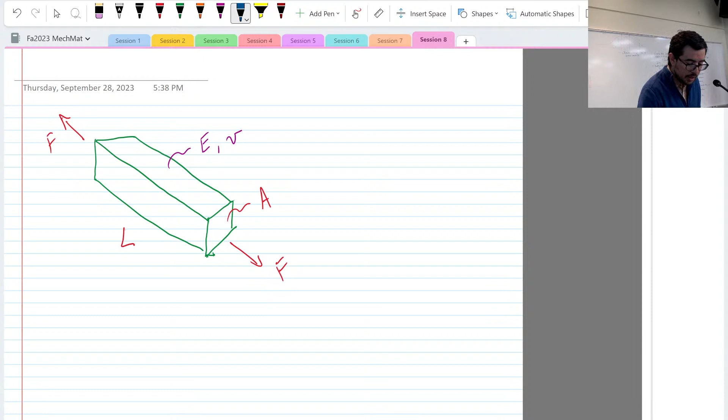If I want to know how much it deflects, you guys tell me, what's the equation at this point? We've done this a few times. What is going to be the deformation, the axial deformation of this bar? Okay, good, delta equals FL...

No, it was a joke, not a very well received. Okay, so it's FL over EA. All right?

And what is the stress, the normal stress? So like if I'm thinking about stresses in this direction, what is the stress? Yes, F over A, right?

Okay, and what is the strain? I'm going to call this sigma x, not sigma, sigma x. I'm going to call this epsilon x. I'm going to call this the x direction, y direction, z direction. So what is epsilon x?

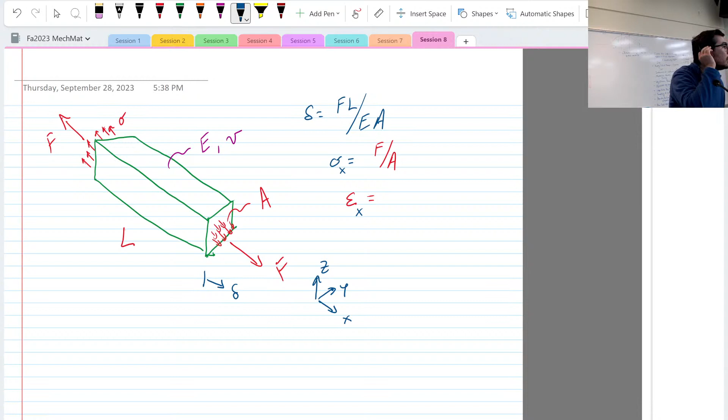Yes? What's that? E divided... what? I'm sorry, say that again? Well, that would suggest it's a constant, right? If you gave me E divided by 3, that just means it's a constant. I'm asking for the strain. The strain is going to be dependent on how much force is being applied.

So the strain is the change in the length over the initial length, right? One way to look at it is you could look at it this way. All right, that would be one way to look at it.

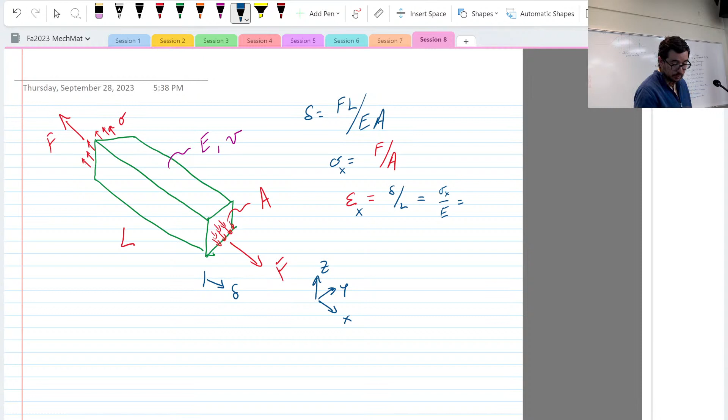Another way would be, if I know the stress, I know that if this is a linearly elastic behaving material, then sigma is equal to E epsilon. So then this is going to be sigma x over E, right? And so this is going to be F over EA.

Any questions on this? So you're like, why in the world would I want to simulate this? I know it all. True.

Okay, why do we do simulations? Because we want to be able to do more complex, understand what's happening in more complex geometries. But these are the baby steps in simulation. One day, maybe you'll look back and you'll be like, okay, I remember I was told this.

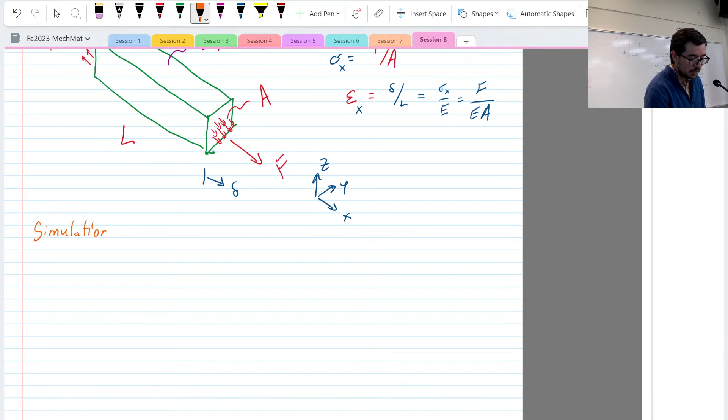Sometimes this happens so often, it happens with me personally, happens with a lot of people. You have this complex problem, and what you want to do is just simulate the living daylights out of it. But that's not the approach that's going to necessarily lead to the fastest determination of getting what you want.

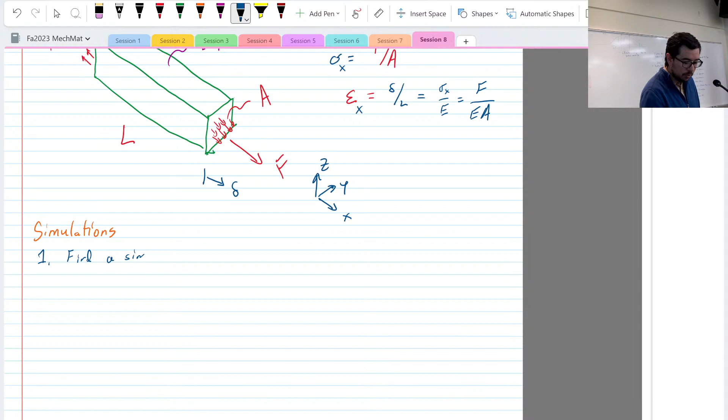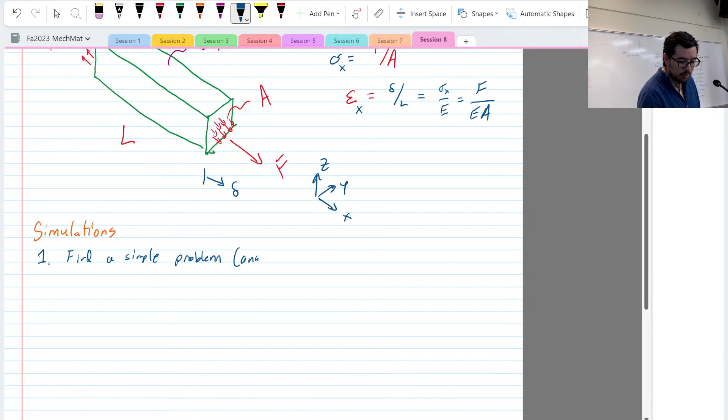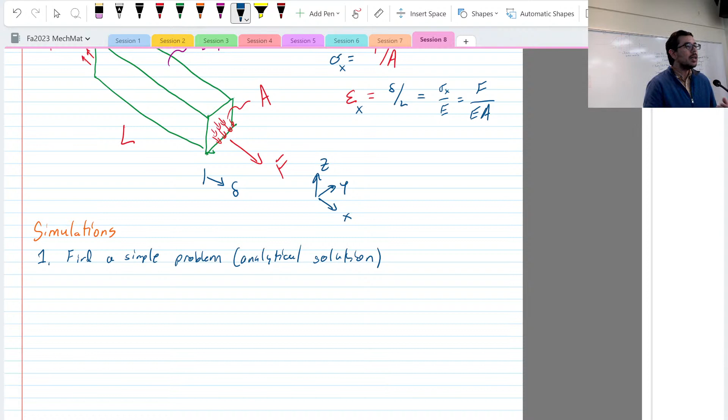So the first thing you should do is find a simple problem that has an analytical solution. This is hard to write on, I know my handwriting is bad, but it's even worse right there. So this is what we just did. We just found, we know what the answer should be by basic mechanics, shall we say.

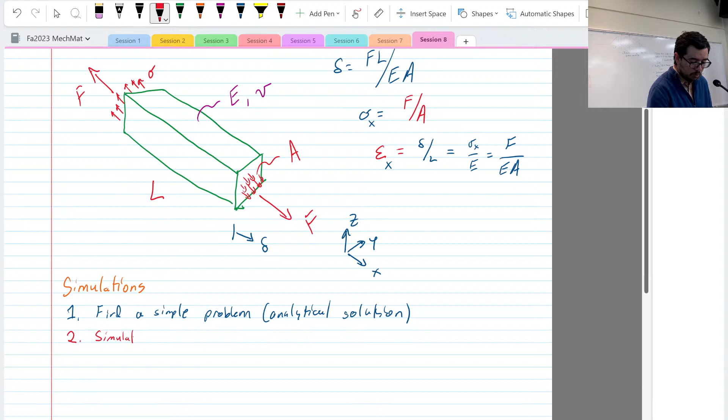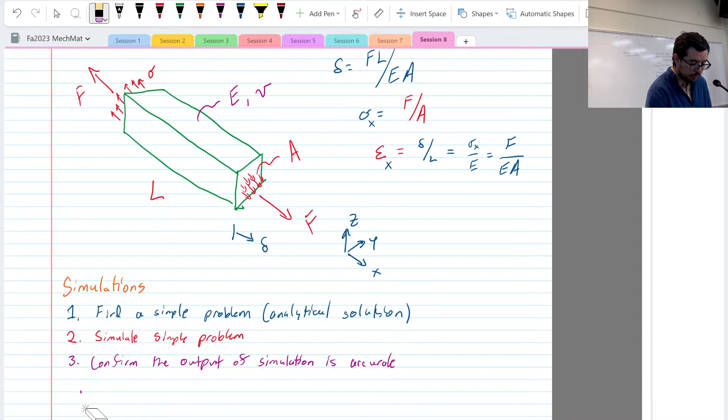Then we simulate that problem. Then we confirm the output of simulation is accurate. And then we go on our merry way of building more complex simulations.

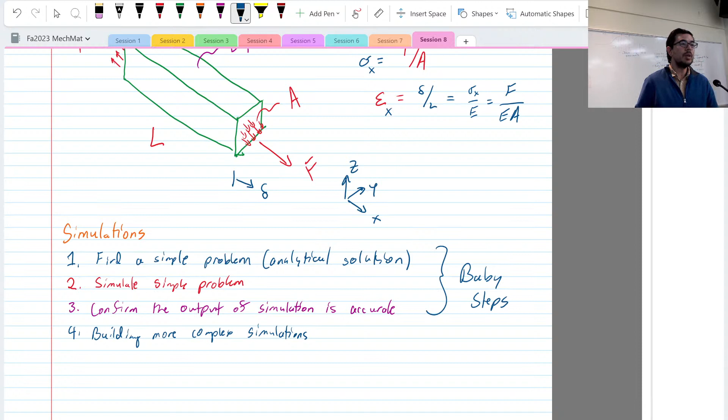If you skip the first three steps, you have no idea if your simulation is even behaving correctly. It's often a good idea to start with baby steps. With simulations, garbage in, garbage out. You can make really pretty pictures that have no relevance, or that do not have quantitative or even qualitative properties that are accurate.

So if you look in your notes, in the online notes, we can find a problem that's given. This is one iteration of session 8, Q1. Actually, maybe I'll just do it like this, it's better.

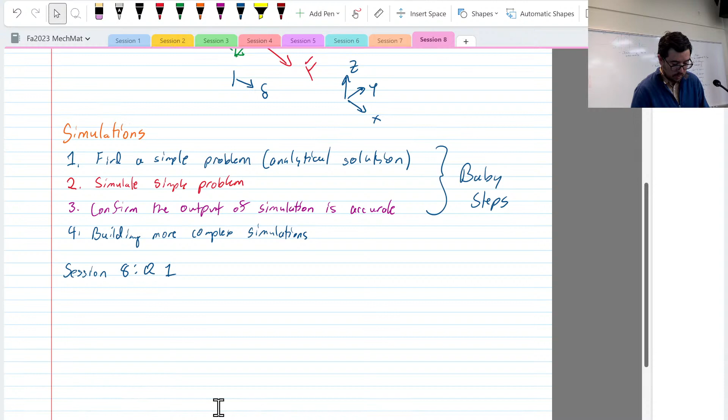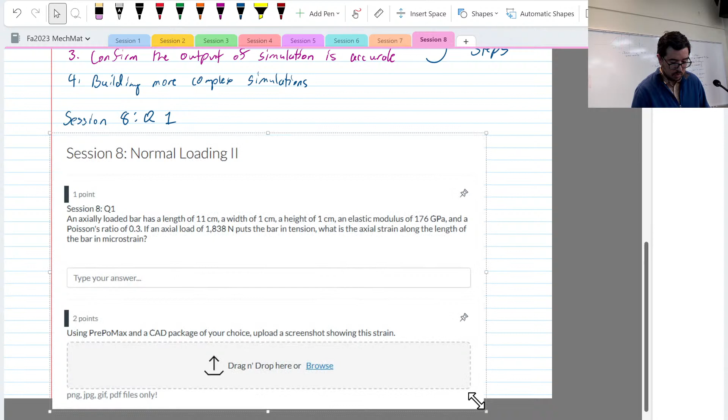We have an axially loaded bar with a length of 11 centimeters, a width of 1 centimeter, and a height of 1 centimeter. That means the cross-sectional area is 0.01 meters times 0.01 meters, which gives us 10 to the minus 4 meters squared.

It has an elastic modulus of 176 gigapascals and a Poisson's ratio of 0.3. It also has an axial load of 1,838 newtons. Did I forget anything? We want the axial strain along the length of the bar in microstrain.

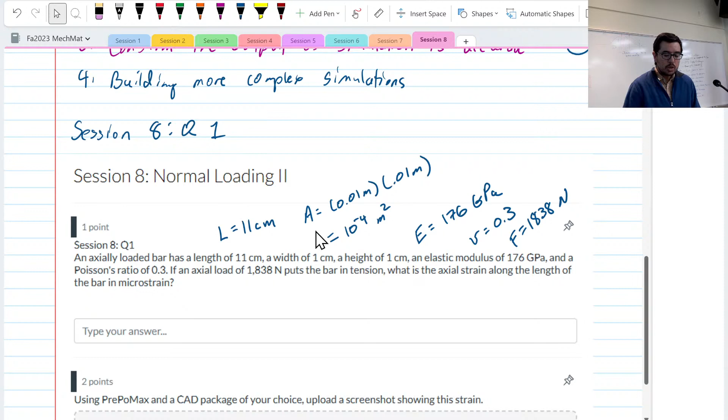What you can do is first build the model, the geometry, and then run finite element analysis. SolidWorks and other commercial packages are nice because they let you do both right there. In some companies, you have one group that focuses on design and another group that focuses on analytical simulation. The designers do their thing, the simulators do their thing, and it goes back and forth. This isn't the most efficient way, but it's a careful way, because multiple people look at different aspects of the same problem.

So if you like, you can use FreeCAD, or SolidWorks, or something else, but FreeCAD is readily available and runs on Windows and Mac. I don't think there's a much simpler way to put in this geometry and get an STL file, which describes the 3D geometry. From here you probably want to pay attention, since it's being recorded and there are other videos explaining this, so you don't have to take copious notes, just pay attention that we're starting.

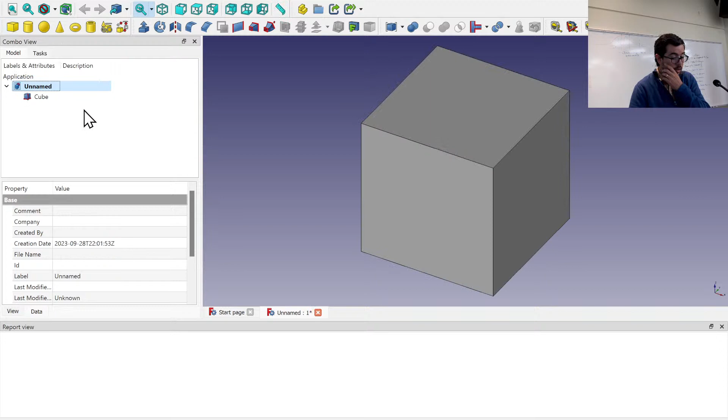We create new, click there, and this comes up with an unnamed thing. We're not going to go to part design, which is what you normally use for extruding. Since this is an extremely simple geometry, we're going to use the part setting, and bring in a cube like that. Then we're going to edit the geometry.

We said we have a length of 11 centimeters, and a width of 1, we can even be dumb here, we'll just put 1 centimeter by 1 centimeter. It converted it for us automatically, and now we've got our bar. Very simple. We can export this to the STL format.

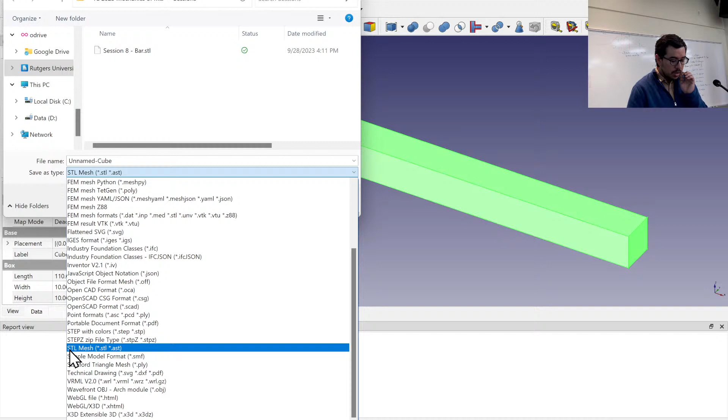You come down over here, make sure, I don't think STL is the default the first time you use FreeCAD, but maybe it is. You export it to this STL mesh. I already have one there, but we can do the unnamed cube, it's going to go in that spot. So we're done here. You can save this in its native format too, as this FreeCAD FCSTD file, whatever that is, but we're done.

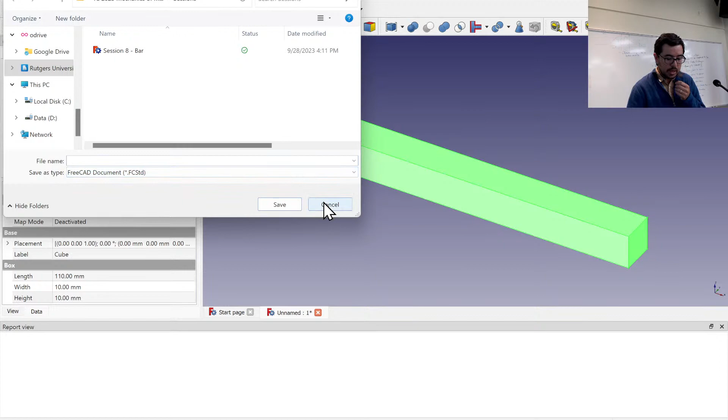So I'm going to close this, I'm just going to discard it. Now, PrepoMax is an open source piece of software which uses an open source physics or finite element engine called CalculiX.

So what you do is go to downloads, and you can see that they're pretty active, the latest one came out just over a week ago. So you download this, and I understand some people haven't used computers that much and don't use zip files. It's been rewarding just to walk around and show people how to extract a file.

So we'll go ahead and save this zip file, and it's going to go right to my downloads. It's taking a little bit longer. When I was a college student, that would have probably taken like 10 minutes to download 67 megabytes. Now it comes up and we right click, and we're going to extract all. You hit extract all and choose where it goes, I'm just going to do the desktop, or let's just do it right there.

All right, and then this is what comes up. Any questions up to that point?

Good, right? Okay, so what we need to do now is bring in our file. But first, we have to create a new model here. So we're going to create this new model using meters, kilograms, seconds, or Celsius, and we hit OK.

Okay, and then once we've done that, we're going to go over to File again, and we're going to import that unnamed cube that we just had. Okay, and there it is. Now...

Can anyone notice anything odd about what we see here? Anything odd? It looks like a bar. What's up with the scale? 66 meters. That is not the dimensions we put in.

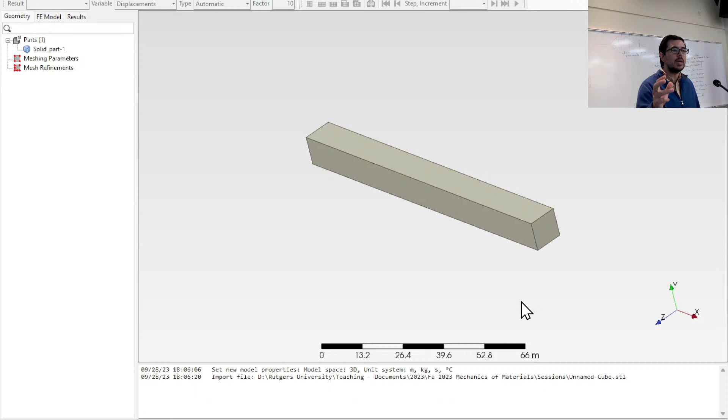We put in that this bar was only 11 centimeters long. If you use SolidWorks or another software, you might run into this issue as well. Once you export to the STL format, dimensions can get messed up. So what you're going to do is come over to Geometry, go to Part, and hit Transform, then hit Scale.

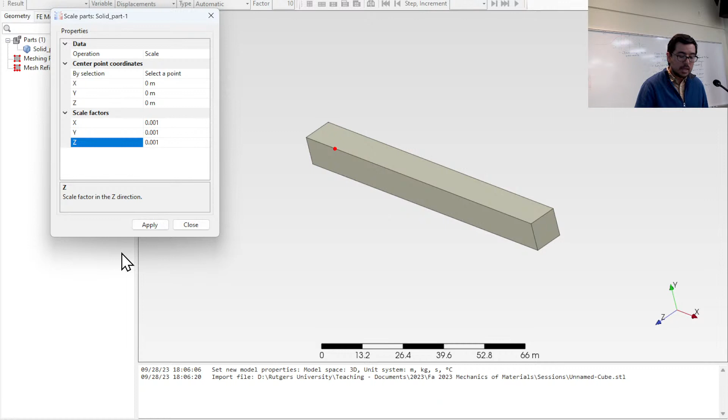And what are we going to do? We are going to scale this thing down by a factor of 1,000, in all three dimensions, X, Y, and Z. Then we hit Apply, and it disappeared.

It's gone. So what do we do? We can do a zoom to fit, and it reappears, and yes, the length has been scaled by a factor of 1,000 apparently. And if we turn it a little bit, we can see that it's now longer than the scale bar.

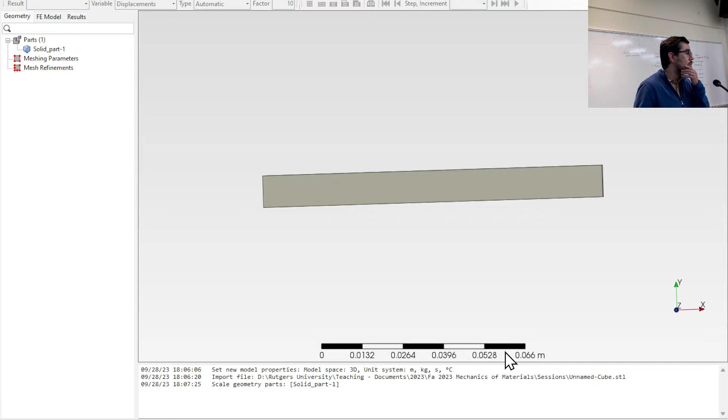What is 11 centimeters? 11 centimeters is 0.11 meters, right? So that's a little bit greater than what you see here. So we're likely on the right scale.

Okay, now what do you do next? For those of you thinking about this, what would we do next here? Right now it's a block, but what are some of the things that we need to do to this block in order to do our simulation?

Okay, we had to pull on it. Good, that's a good thing, Michael. Yes, we're going to pull on it. Good, what else do we have to do?

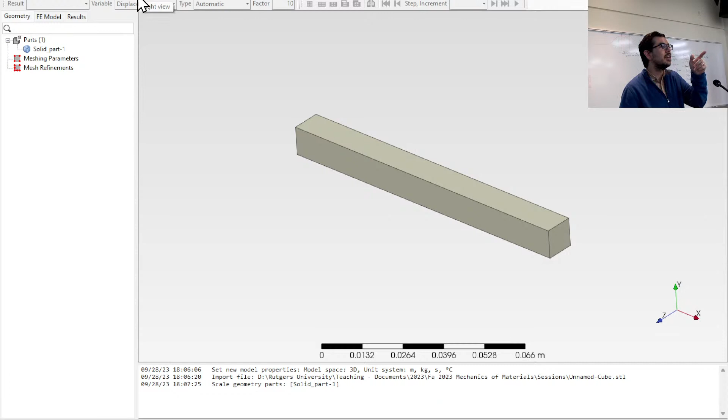Yes, so we're going to pull on one end, and we're going to have one end fixed. Good, yes, with a force. Good, yeah, what else? What does the computer know about this block at this point?

All right, we need to give it some material properties, right? We need to give it an elastic modulus. We need to give it a Poisson ratio. All the simulation knows at this point is its geometry, which is a big deal, right? That's a big deal. That's why we do these things.

Okay, so we are going to do those things in just a minute. There are a couple other things we have to do first. So one is finite element.

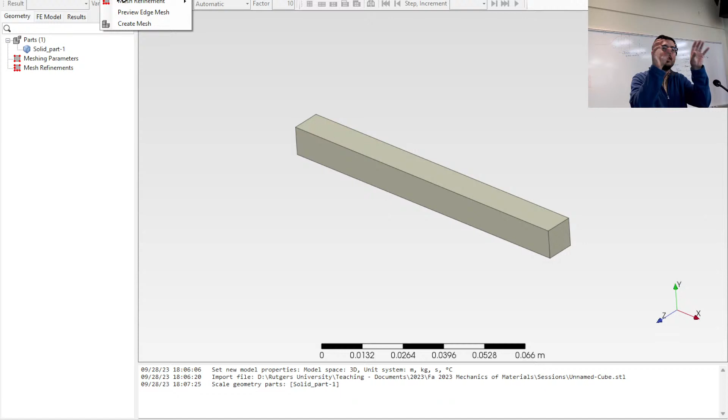All right, suggests that we have elements, and that these elements are finite in size, right? So what we end up doing in finite element analysis is taking a large object and discretizing it into lots of small elements that make up the big geometry. So in the case where you have something that's curved and you have a lot of little blocks or stuff in it, it's an approximation to the actual thing. And in this case, it will still be an approximate.

But the nice thing is that cubes fit inside cubes quite nicely. But it's not necessarily going to be cubes. They can have different types of elements. So you're going to see some kind of interesting things happen.

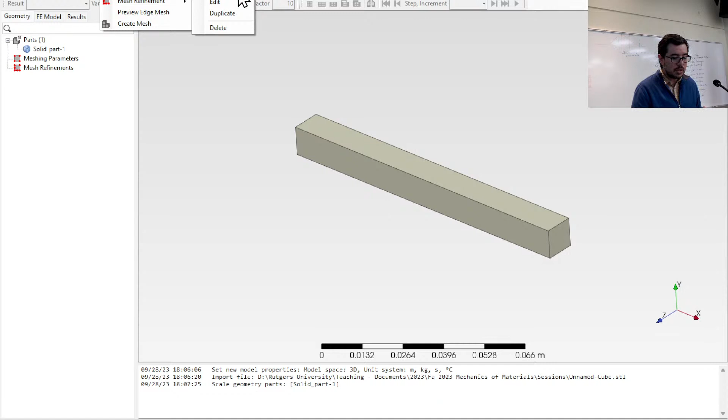So what we're going to do is we're going to mesh first. This is not how all software works, but this is how this one works. We mesh, we select the part. So I clicked on it, so now the part is selected, and we come over here and we're going to specify the maximum element size. That's actually not that bad as a size. We're going to say that the maximum element size is going to be 2 millimeters, 0.002 meters.

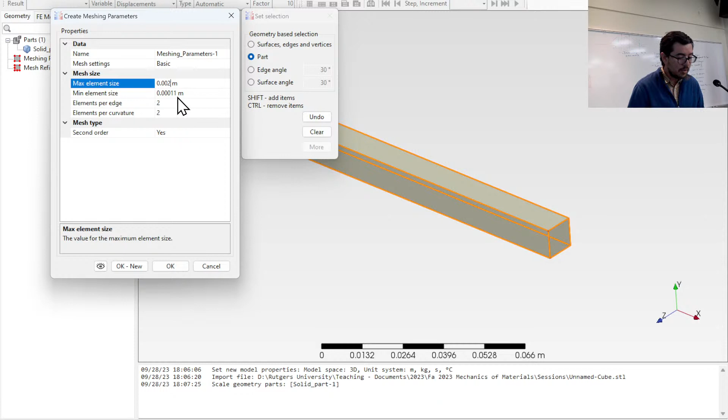The minimum size is actually going to be even smaller than that. That kind of makes sense. So we hit OK, and nothing happened, because all we did is set the mesh parameters.

Now we're going to create the mesh. We give it a second, and voila. You see this? So now it's been discretized into a bunch of elements inside that block.

At this point, we can start to go ahead and assign some material properties. So let's go. We're going to create a section. This section is a solid section. Sorry, and we gotta... oh, okay, sorry, I guess we do have to do the materials first.

So materials, we're going to create, and this is an elastic material. Let's just call it material. Session 8, okay? It's 176 gigapascal, so that's not really steel. I don't know exactly what this is.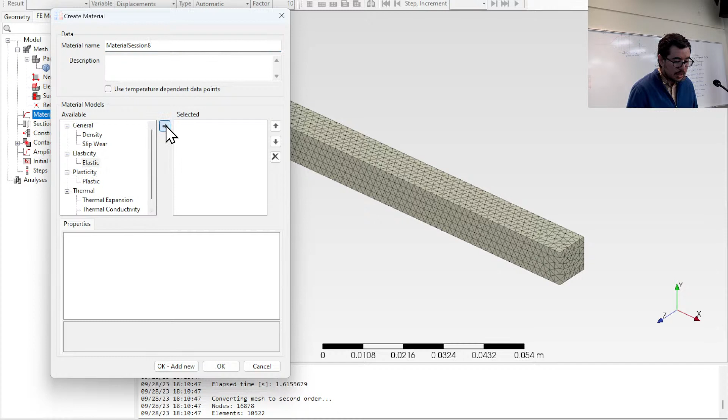But I'm going to go ahead and select elastic and put this over here. And look, this is also neat — I can do 176 gigapascals, and it puts in all the zeros, and I can put in 0.3 for the Poisson ratio. And we hit OK.

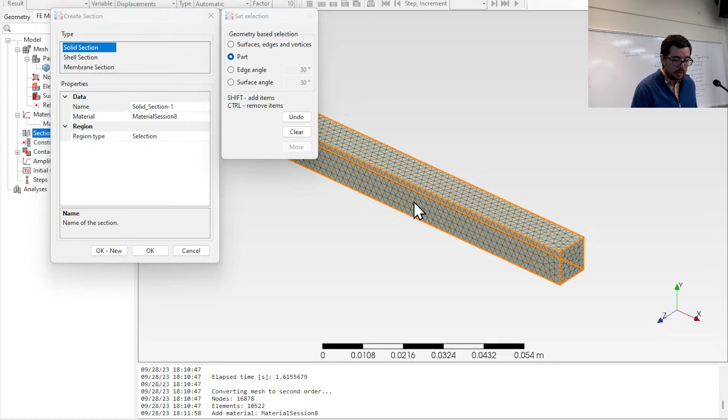Now we're going to create a section. We're going to create a solid section, and that's for the whole thing. I'm going to click on it, and we hit OK. So that's our solid section.

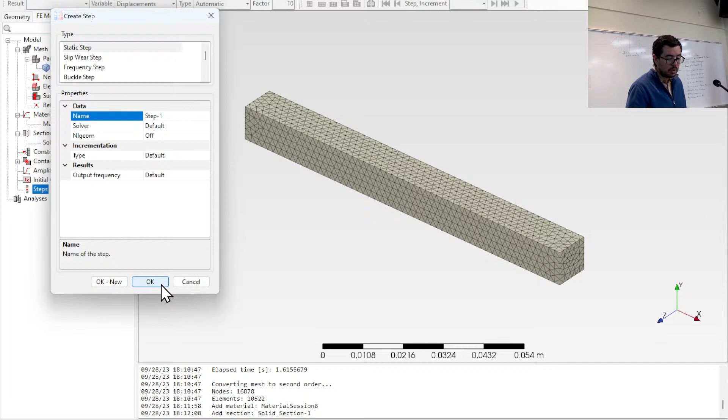Then what we can do is we're going to create a step. So this is kind of, what do we want to simulate? We're going to simulate a static loading, right? That's what this class is about. So we're going to do static step, and we're going to hit OK. And then a bunch of stuff comes up over here.

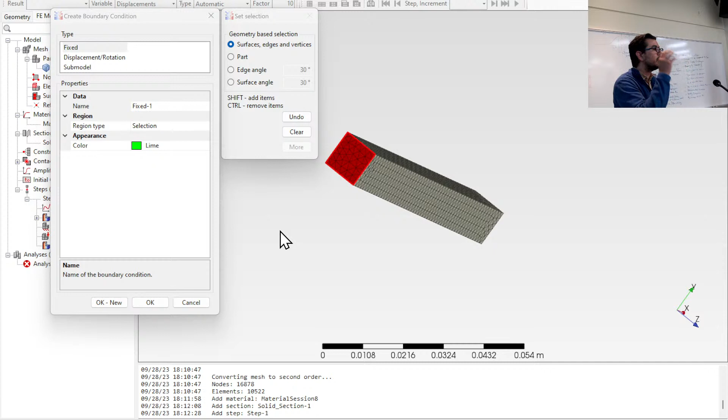At this point, we're going to set the boundary conditions. For the left side, we're going to make it fixed, so it can't move — it's stuck in space. With static problems, with finite element analysis, often that's what you need to do. You need to constrain all 6 degrees of freedom of something. Otherwise, this thing can move in space.

6 degrees of freedom — what are the 6 degrees of freedom? Good, that's right. So usually up, down, left, right, forward, backward, and then the rotations about all those axes. So we hit OK there, and that side's constrained.

Now, there are a couple ways to apply the load. What is weird is if you do this, it will come out wrong. So I'll show you what to do wrong. If you hit create and you do a load and you do concentrated force and you select this side, guess what it does? We'll just say it's, I think it was 1838 newtons.

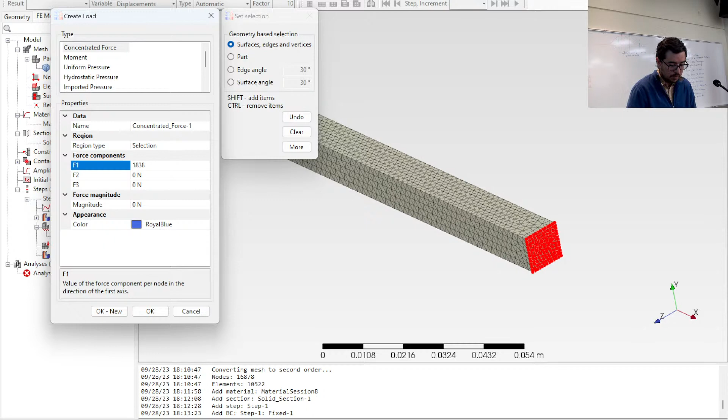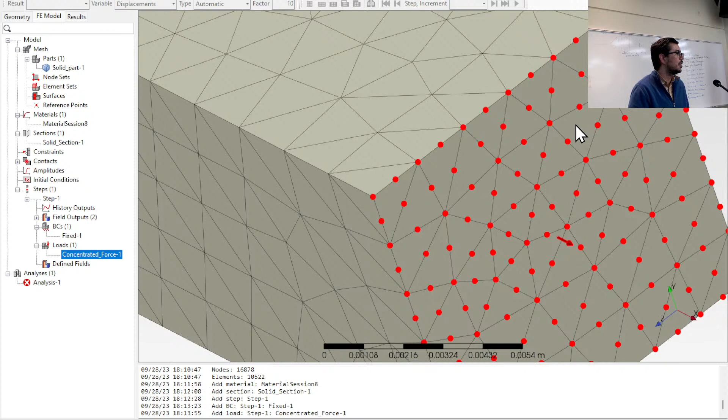It shows it looks good right here, whoops, okay. It kind of looks good, like there's this arrow here, but it turns out that it just applied 1,838 newtons to each and every one of these red dots on the end. Not ideal, okay? You could figure out how many dots you have and divide by that, and then take 1838 and do that.

There are 2 other ways that you can approach this problem — actually maybe 3 different ways. One is you can apply a pressure: you figure out the area, you figure out the forces, divide by the area, and you apply that pressure. That's what the previous tutorials, or my previous approach, was.

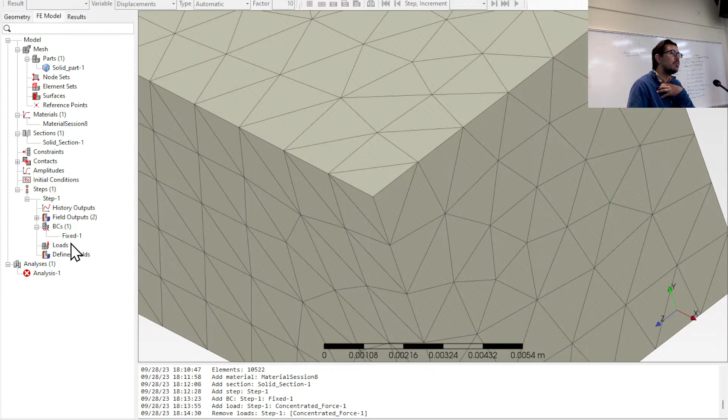There's another way. You can actually create what's called a surface traction right here. This surface traction, if you do this, we're applying it in the one direction. I guess I should have explained that — you see, this is X, Y, Z, 1, 2, 3. So if you apply it right here, this surface traction, you're done.

And so we can go ahead and we can simulate this, right? So if we go to analysis and we go to run, okay, it runs it, and we're done. Okay, and pretty colors.

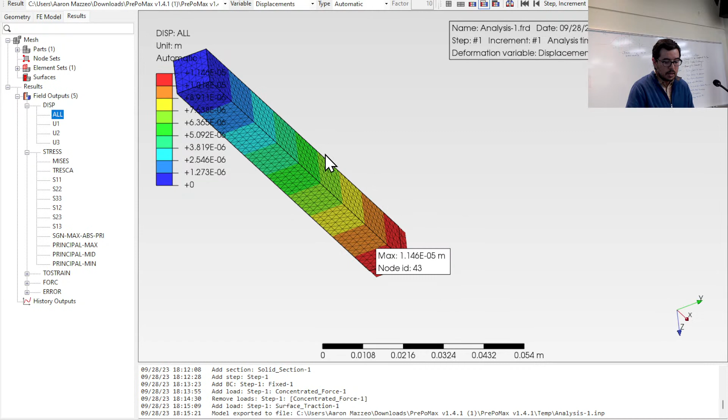There's another way you can do this if you so desire. What's going on here? The other way to do this is we go back to the FE model and we delete this surface traction. We actually create a reference point, and we're going to put it at the end of the model.

You see here it's about there, so I'm going to specify coordinates for it. It's 11 centimeters out, 0.05 meters up, and 0.05 meters to the side. We hit OK. Oh, whoops, it was 0.005. Let's edit this.

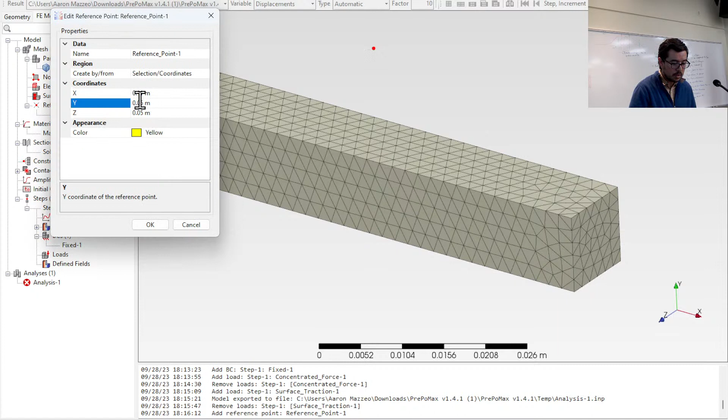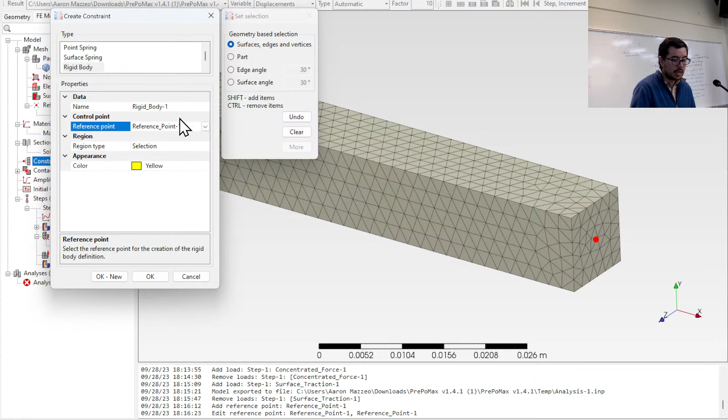Okay, you see that point is now there? And that's just because I know what the coordinate is. Then we come over to constraints, and we're going to create a rigid body constraint, and it goes through the reference point. It's already selected, and we're going to click on it on that surface, and we hit OK.

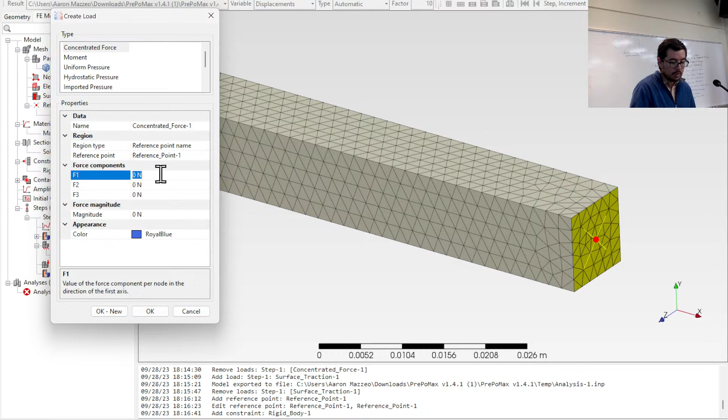Now you see this thing is X'd here. Now we can go ahead and define a concentrated force, and we can specify that it be applied at reference point 1, okay? And then we can put the 1838 newtons. Just like that. And then we can go ahead and run the analysis.

Yeah, we're going to overwrite. Okay? Good. All right. So now we've got a simulated result. So is this what we're gonna submit like to Canvas, just a screenshot of that? Yeah, but you gotta do one or two more things before you do that. But you're gonna do this and submit the screenshot of the result. Okay? And there's also a question, right?

It asks, what is the strain in microstrain? What is the axial strain in units of microstrain? Well, before we even do that, we looked at this analytical model previously, right? And we said, I know what the displacement is, FL over EA, right? I know what the stress is, and I know what the strain is. I can make all these calculations.

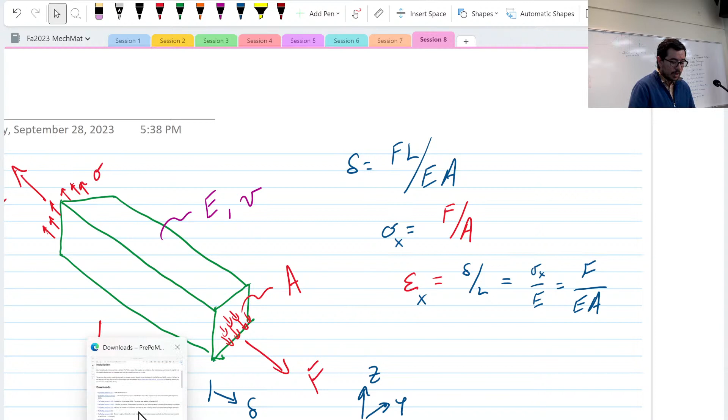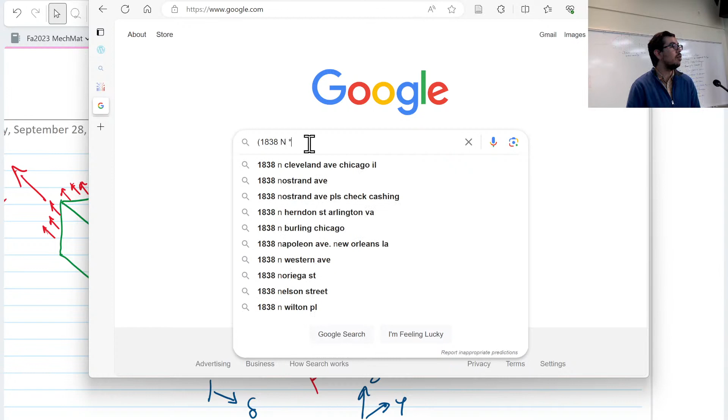All right, so let's do the super cheaty way of calculations. Let's say we want displacement, right? Displacement was FL over EA, right? So let's go ahead and put in 1838 newtons, that's the F, times the L, which was 11 centimeters, right? And then what was the FL over EA?

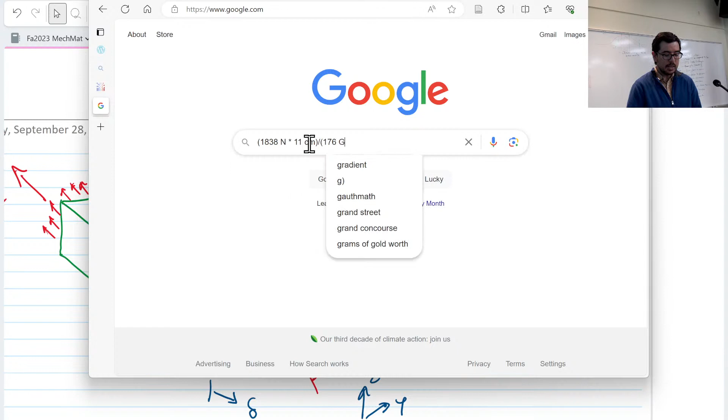And then the elastic modulus was 176 gigapascals. And the cross-sectional area, right? It's 1 centimeter by 1 centimeter. Okay, that's FL over EA. Plug it in. Okay, it tells us that the displacement is 11.5 microns.

We could have done this the whole time. Well, this is the analytical solution. Yes, instead of having to do all the conversions by hand. So you're saying you could have done this to get away from having to do the conversions? Yeah, I think I said early on you can use Google, but you have to understand you're not going to have Google when you take the exam.

All right, so now we go here, and I want to figure out what is the overall displacement. Let's click on U1. Sorry, let's do U1. All right, and I'm going to put. You see this? You see that it's like, okay, 1.14 times 10 to the minus 5.

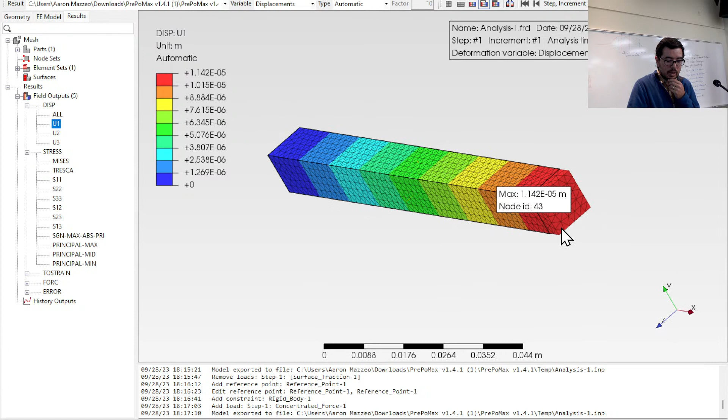That's the max. That's the red part. The other thing you can do is you can add a query at the end. So I'm going to add a query here, okay? And this query at that point is telling me it's 1.14 times 10 to the minus 5. 1.14 times 10 to the minus 5.

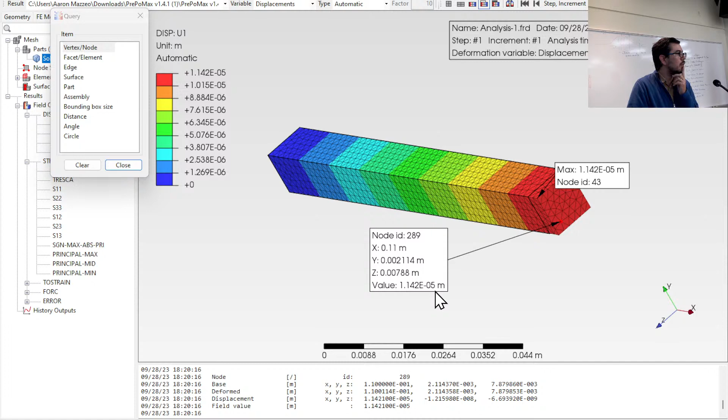What is that in microns? 11.4. And what did we calculate? 11.5. That's pretty close, okay? All right, so that's happiness, right?

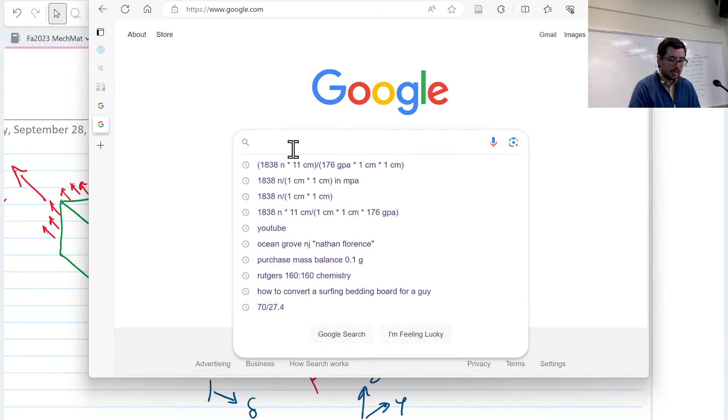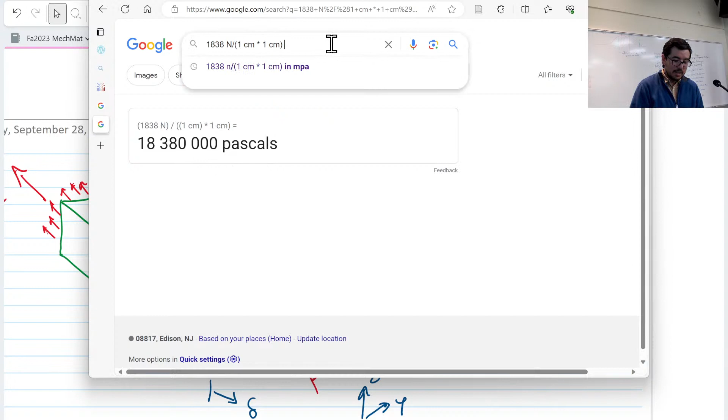What is another metric that we said that we had? We said F over A, right? That's a simple one. All right, so let's do that. So F over A, that's 1838 newtons divided by... well, I don't even have to do that. I just do 1 centimeter by 1 centimeter. Okay, and it gives it in a big number in pascals, but let's say I don't want it in pascals, right? I did this before, so we just do MPa. All right, 18.38 megapascals, 18.4 megapascals.

All right, so we come over here. We need stress. So look, stress. Now remember we talked about sigma 1,1, sigma 2,2, sigma 3,3, sigma 1,2, sigma 2,3, sigma 1,3 early on, right? That's what these are. S11, S22, S33. That's like sigma, okay? So S11, if you do it like this, right? And we look at our node right here. Okay, now it's not quite in the center, all right? And it's at the end, so maybe that's not the best choice. Let's pick one over here, for example.

Let's do a query, okay, right up here. Look at that. So that's 1.83 or 1.84 times 10 to the 7th. What is that in megapascals?

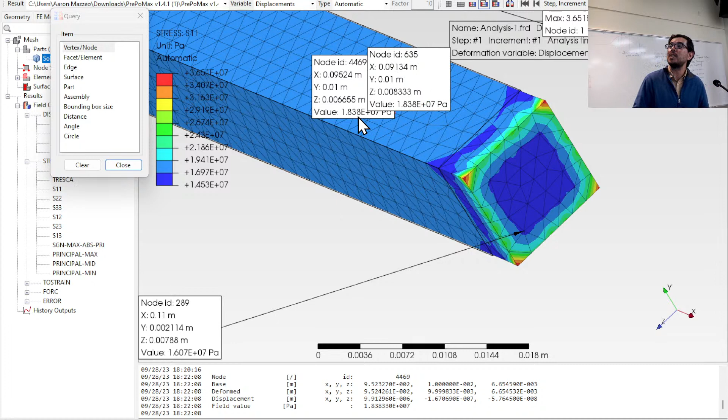What is this in megapascals? 1.84 times 10 to the 7. Yes. 18.4. So we go back. 18.38. We're pretty close, okay?

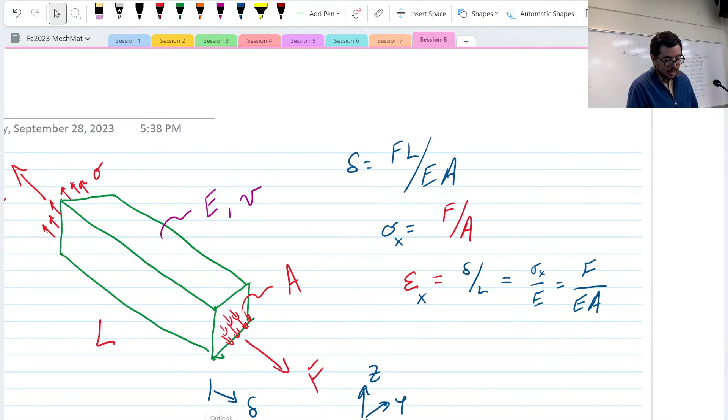Now let's go ahead and look at strain. Strain is F over EA. So we go back, and this time we'll give Bing a shot. 1838 newtons divided by 176 gigapascals times 1 centimeter times 1 centimeter.

Okay. And see, unfortunately, Bing is a little bit not as friendly. Oh, I also made a typo though, so 1 centimeter by 1 centimeter. I don't think that's going to change anything. Nope, it does not change anything. So now we'll go to DuckDuckGo.

All right, again, not so friendly. It's a little bit upset. All right, so I guess we'll go back to Google.

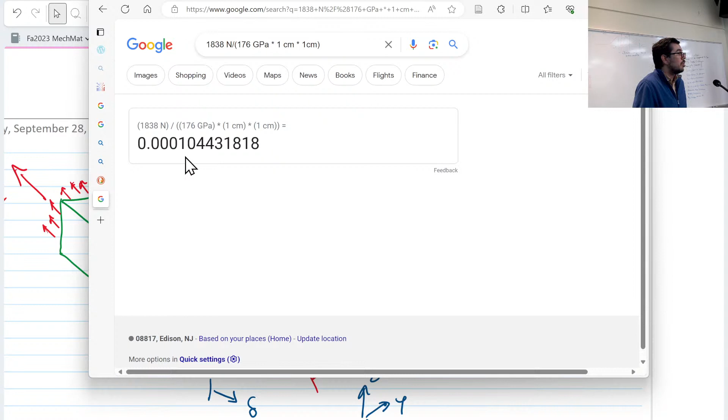That's an annoyingly small number, right? That's why the answer is in microstrain. So how do you get this in microstrain? What do I multiply by? By 10 to the 6. So I get 104.4, all right.

Now let's see what we get, or we get that other number, right? But we're in microstrain, all right? So let's go over to this, and we're going to now go to the strain, all right? And we're going to look at E11. And we're look here: 0.0001045.

What do we get here? Well, if I take away the... that's the same, right? 0.000104. All right, pretty stinking close. All right, any questions on this?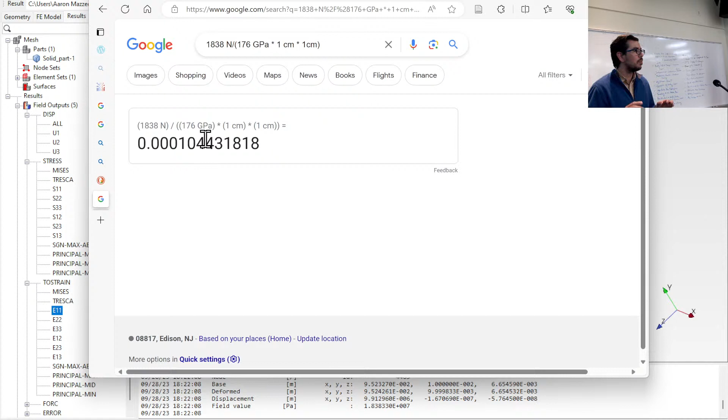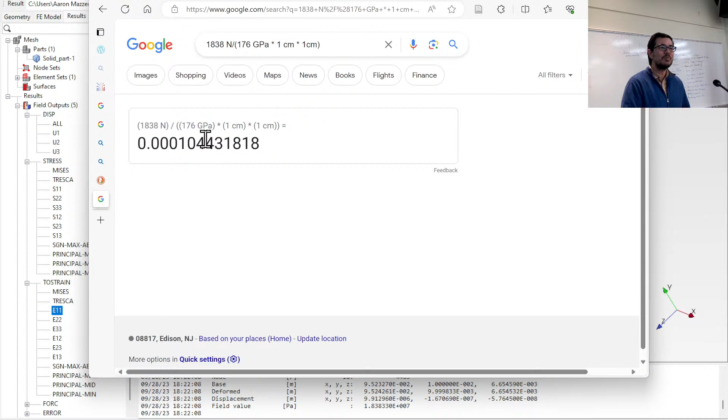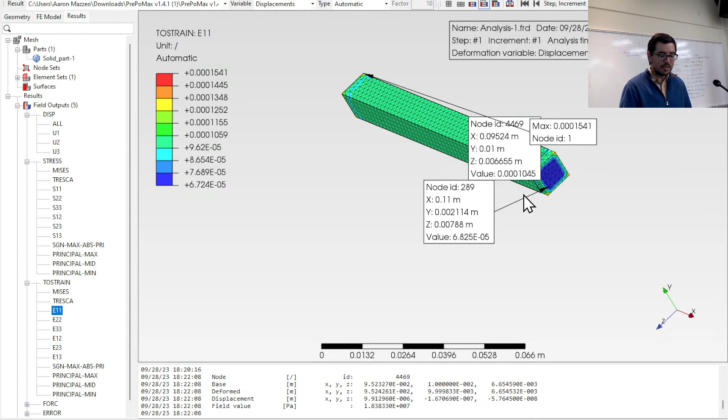So now, when you go in for your internship interviews, right, they'll be like, 'Hey, have you ever done finite element analysis?' I'm like, 'Yes, I did finite element analysis.' 'Really? You're only a sophomore?' 'Yes, we did it in my mechanics of materials class.' All right. Now, are you an expert in finite element analysis? No. But have you done it? Yes. And you're like, yeah, there's this really cool open source package that lets you do it without having to pay thousands of dollars a month to use the software.

So the next part of today's session involves thermal strain, okay? And I'll let you all get to this, but this is maybe a little bit old and new at the same time. If you take a material and you heat it up, what typically happens?

It strains, okay, could bend? Yes. So bending can happen for sure if you have a piece of material and you heat one side, okay, and the other side stays cold, you can have bending. All right? And if it's a conventional material, if I'm heating this side, which is like my pen, and the top is cooler than the bottom, which way will this bend?

Up, right? Why is that? Yes, I know what up means, yes. Why is it going to bend up? Yes, so what's going to want to happen, right, is this side, the bottom surface, is going to expand laterally, and it's going to become longer than the top surface, and that's going to cause there to be some strain. All right.

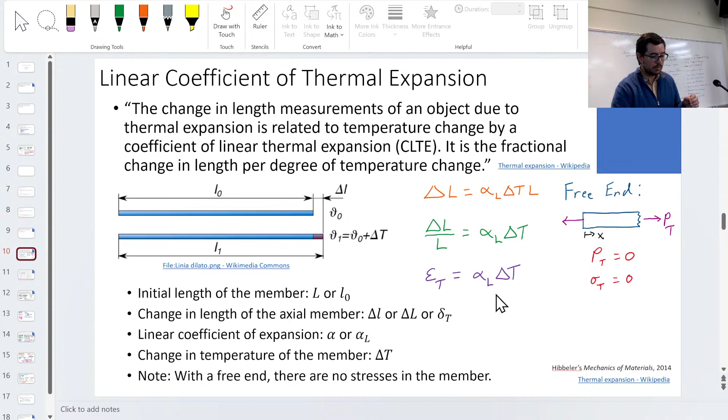Strain, so for the free bar with free ends, the strain can be given by the linear coefficient of expansion, called alpha, or alpha L. If you see alpha in this class, assume we're talking about the linear coefficient of thermal expansion. If you see alpha V, that's the volumetric coefficient of thermal expansion.

Remember the relationship we talked about last time between volumetric strain and linear strain for a cube? The volumetric strain, the dilatation, or e, is equal to 3 times the lateral or edge strain on a cube in any one dimension. It's kind of similar here: the coefficient of volumetric expansion is equal to 3 times the coefficient of linear expansion.

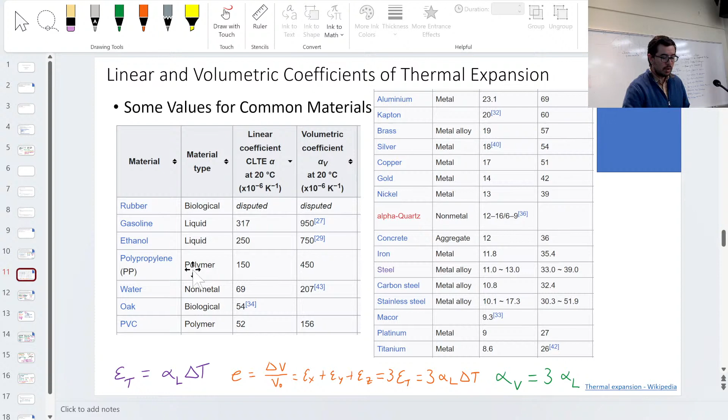And then there are some values here if you want. So what you get a chance to do is some problems like you'll see here, where maybe we have an unconstrained beam and then we have to apply a load to bring it back, and figure out what amount of force is required to do that.

Well, the amount of force, the material properties have not changed. What has changed is the length. So now we have to figure out what displacement we need to apply to get it to go back to its original length.

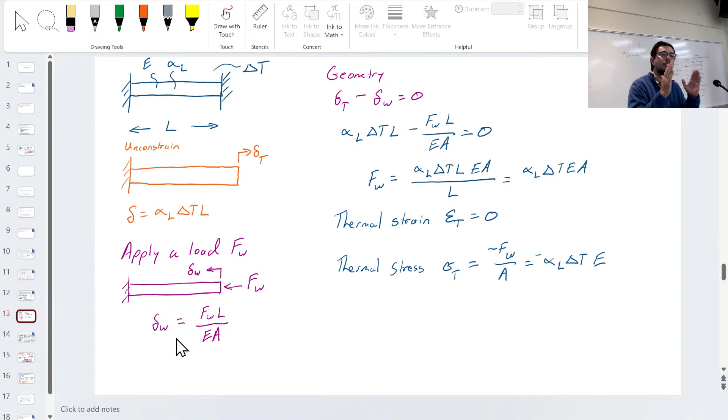And then a somewhat complicated problem is what happens if you have 2 materials between fixed walls, and those materials have different elastic modulus, different length. In this case they have the same area, but they could have different area. What happens if you heat up everything uniformly? You can ask, okay, what's the force that builds up, for example?

And maybe another question is, how far to the right or left does the middle between them go under these circumstances? There are 2 ways to do this: one is using geometric compatibility, and the other is to use superposition. So I include instructions on how to do both of those. There was a question, yes?

Okay, so here is the middle, right? It's kind of like a tug of war. For example, let's do some thought experiments. Let's say that the lengths and the areas are the same, the temperature increase is the same, but that E1, the elastic modulus on this one, is much larger than the elastic modulus on this one.

In that case, which direction do you expect this to go? To the right? Because that high elastic modulus essentially is bullying the one on the right. It just says, I don't care, you got nothing on me. So this is going to be maybe like your metal, and this is going to be like, I don't know, another material.

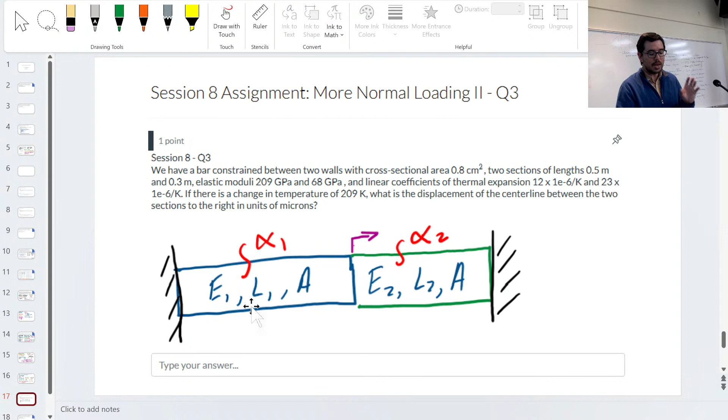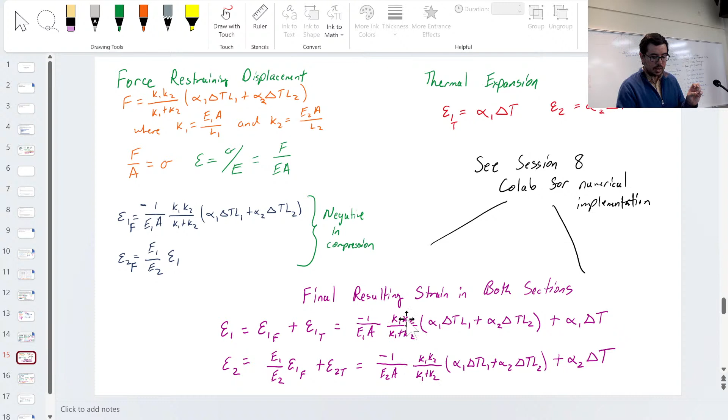If I come over here to the answer, the strain, all right, let's see here. If all these things are the same, where's the... I should know this, but I have to think about this a little bit. That's what happens when you ask a tough question.

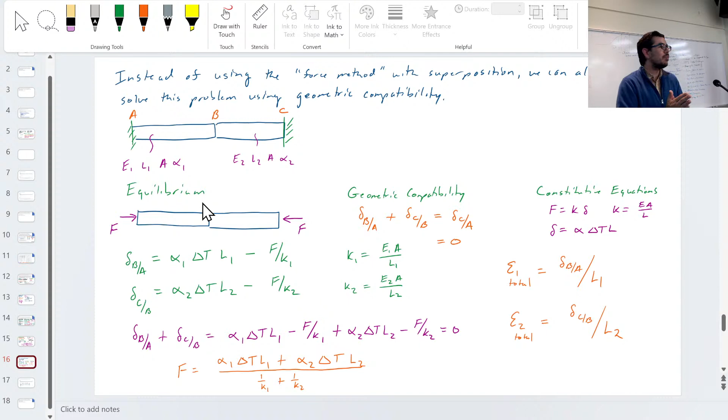Yeah, I had to think about that. We'll get back to you on that. I don't want to say the wrong thing. It's either left or right. All right, so go for it.

We were working on it outside. I'm actually very frustrated because I can't figure it out. I've attempted it like 6 times now and I can't get it. I can show you too if you want.

When you run the analysis and then you switch it to E22, is that what you switch it to? What magnitude is that supposed to be at? Like 10 to the what power? I've been getting 5s and sometimes 7s when I forget to scale it.

So the Poisson ratio - let's just say that. First of all, it should be equal, right? Because if I'm stretching this direction, it's contracting this direction. And the typical ratio is 0.3. So the Poisson ratio is equal to negative strain in the lateral direction over the longitudinal. So whatever you had for your longitudinal times 0.3 is what it should be.

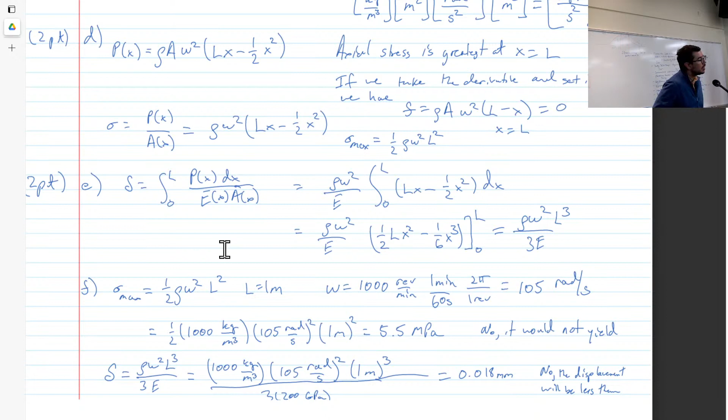Okay, so when I was integrating it, I was getting the wrong answer, but then when I wasn't integrating it, I was getting the right answer. I don't know what to say. I did it like 3 or 4 times each way, and each time that I integrated it, I got the wrong answer, and each time I did not integrate it, I got the right answer. I don't know. Was the distributed force correct?

So this is the distributed force, right? Yeah, exactly. Okay, so then I've got to integrate it, right, to figure out what P is, the internal force. No, it was asking what the distributed force was at that point, so this is the answer. That's the answer. You just plug it in there.

Yeah, so okay, that's the first thing, that's the distributed force, right? Then for 4, I did all of the integrals, and this is what I got, but it's wrong. But then I accidentally put it in this way, and it's right. I don't know what to say.

So when you're doing the integral for 4, which is you need to find the internal force at a certain point, like L over 2, you're gonna take the integral. Okay, that's an interesting way to write it because it's not a cantilever beam, right? So it's actually going this direction. I was just thinking because that's how it shows it, but no, it's going along the beam.

Okay, so then halfway, the distributed force is going this way. But are you gonna take the integrals from 0 to L over 2? I mean, what I would do is do an indefinite integral first. Or actually, if you need the entire length, you do 0 to L. Yeah, so the 0 to L will be the force on the end, the resultant. Well, no, so we have an expression for the internal force, right? So P is changing as a function of x.

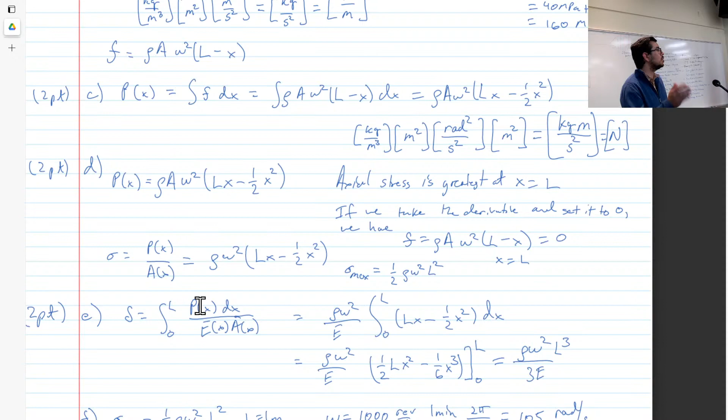If you slice such that—and that's what I was trying to help people with—if you slice from this side right here and expose the left side, you don't have to worry about a reaction force at the middle of the system. All you have is distributed force on the right, so then you would just use P of x.

And the integral of the distributed force over that length will equal P of x. That's why this one was working, because it's just plugging it into the integral. When people show me their stuff that fast, there's no way my brain can compute everything and see how that's different. I hope that helps.

What's your name? Anthony. Okay, thanks. How's it going? I run track and field.

These are like my travel letters, and the ones I have highlighted are the ones where I missed class. Would you be able to sign it? Can you send me an email? There's no way I'm gonna remember this. I just need it for the record to give to my advisor. That's fine, I just can't remember. I'll send you an email—you have to send me a message the day that you're away.

Oh okay, well that's good that we changed our exam not to be that day. But I missed dynamics. Oh, I'm sorry about that. When is exam 2? I have to check. But are we good for exam 2? I think exam 2 is the Tuesday before Thanksgiving, and these are Thursdays, so it's not that.